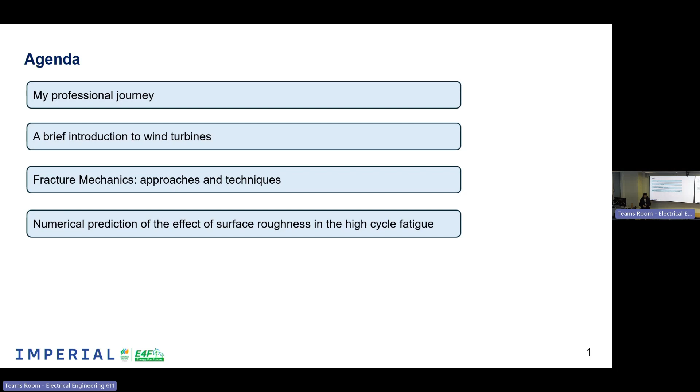So first of all, I'm an MSCA E4F fellow at Imperial College. I started 1 year ago in February 2024. E4F comes from Energy for Future. It is a network that is inside the Horizon 2020 MSCA co-fund. In this program, projects are co-funded by Marie Curie Actions and also an entity, and in this case, the entity of our network is Iberdrola. Inside our network, we have projects related to energy, basically, but to different areas.

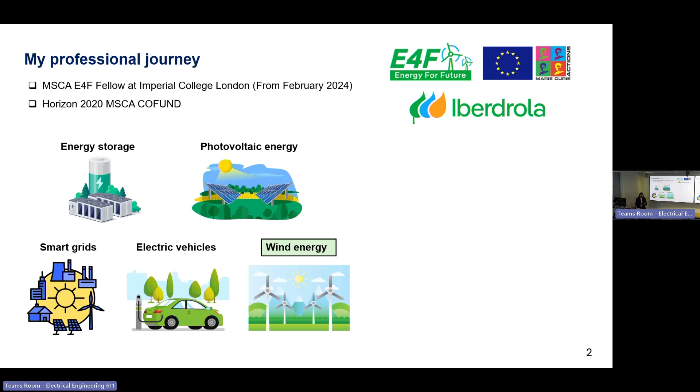I also belong to 2 research groups. The first one is the Mechanics of Materials Lab at the University of Oxford. It's a research group in charge of studying the mechanical behavior of materials for different applications. For example, hydrogen, batteries, wind energy, concrete. Moreover, I also belong to another research group at University of Seville. It is a research group also in charge of studying the mechanical behavior of materials, but in this case for aircraft, solar energy, trains, wind energy, etc.

So now, coming back to the topic, I would like to explain to you, before going deeper, why it's important to talk about wind energy. So today is Thursday, 20th of March, and from the beginning of the week, the world has consumed more than 4 million millions of terajoules. You can think that this is a huge quantity, but in fact, it is increasing. It's increasing at 2% per year. 80% of this energy comes from fossil fuels, and about 5% comes from wind energy. Looking at these numbers, maybe you can think that this percentage is so tiny. Why is it important to talk about wind energy? Let me go further.

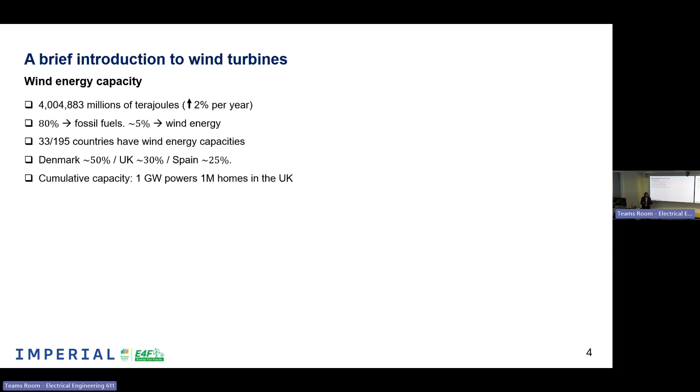33 out of 195 countries have wind energy capacities, so not a big percentage in the world. And there are countries in which wind energy represents a huge percentage. For example, Denmark has 50%, UK 30%, and Spain 25%. So actually, wind energy is important, but it's particularly important for certain regions in the world where it's becoming an important energy source, such as Europe, no?

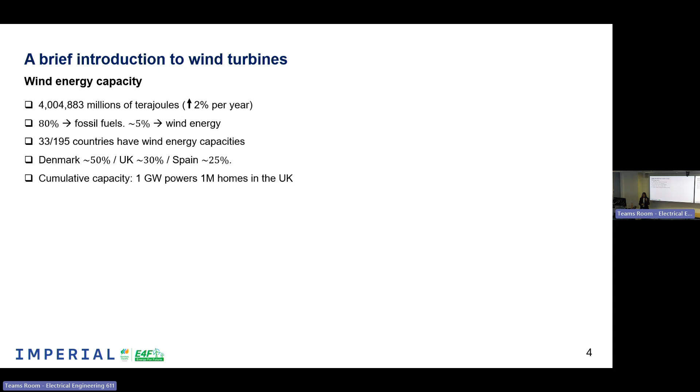In fact, when we talk about wind energy, we don't talk about these numbers. We talk about cumulative capacity, that is the power that a certain installation or a wind turbine is able to produce. Just to give you a number, if we can produce 1 gigawatt of power, then we will be able to feed 1 million homes in the UK. So looking at the cumulative capacity in the last 14 years, you can see that it has increased dramatically. It has increased about 5 times.

Moreover, I have also included 2 types of energy here. One is onshore wind energy, that is the one generated on the land, and offshore wind energy, that is the one located in the sea. And as you can see, 14 years ago, offshore wind energy was representing just a tiny percentage because the technology was not fully developed. However, 14 years afterwards, it is almost the same between onshore and offshore.

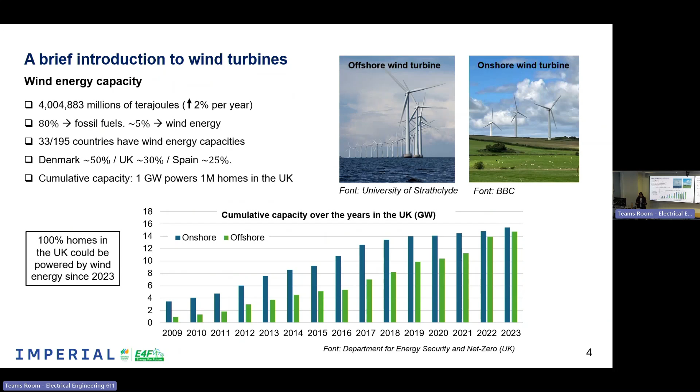If you look at this number, the one in 2023, it is more or less 30 gigawatts. And in the UK, we have about 30 million homes. So that means that if we use the wind energy only to feed homes in the UK, we will be able to survive with that, no? To work only in the homes.

So how is this wind energy being generated? Well, they are generated by wind turbines, and they are a clean and cheap system. They are one of the cheapest ways to get energy, and they are clean because they don't produce greenhouse gas emissions. Maybe you know that, but I would like just to clarify.

They are made by a tower, a foundation that is connecting the wind turbine to the floor. The blades, normally the typical configuration is 3 blades. The nacelle that connects the blades to the generator to generate energy. The wind vane that is in charge of detecting the orientation of the wind so that the wind turbine is always facing the direction of the wind, and the transformer that is in charge of increasing the voltage of the energy so that it can be easily transported.

If we talk about offshore, then the foundation is a little bit different because we are in the middle of the sea and we have different proposals. The most typical one is the monopile. We do well to talk about offshore because, in fact, offshore has much more potential than onshore wind energy. This is because offshore wind turbines can be bigger because they are in the middle of the sea, so we can decide the size of these kind of devices, and they can face stronger winds.

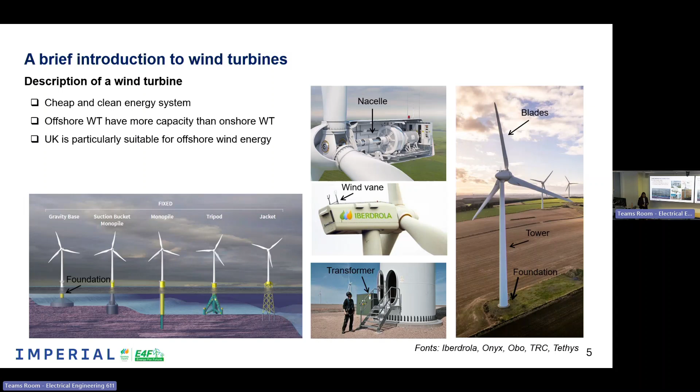And in fact, this is very important for the UK because in the UK, we have long coastlines, we are an island, and we have strong winds. So we can use this methodology to get energy very easily. So offshore seems to be a promising solution, and in fact it is.

It is the largest rotatory machine in the world. Here in this picture, I have compared the offshore wind turbine with the Airbus A380, that is the largest civil passenger aircraft in the world. And as you can see, it seems like a small animal next to the wind turbine. So the wind turbines are very huge.

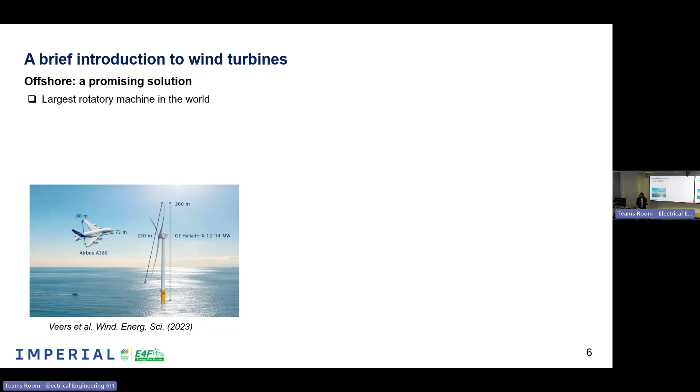In fact, what is more interesting is that it's a technology that is growing really, really fast. The first wind farm was installed 35 years ago in 1991 in Denmark. It had 11 turbines and a total of 5 megawatts of energy production. However, nowadays we have projects that are huge. For example, I would like to highlight Hornsea, that is a huge wind farm in the UK. It has like 4 different phases, and now we are at phase 2, Hornsea 2. And actually, it is the largest wind farm in the world.

It has 165 turbines, and each turbine is able to generate 8 megawatts. The total production is about 1.4 gigawatts. But looking at those numbers, something very interesting is that one turbine from Hornsea 2 is able to generate more power than the first wind farm that was installed just 35 years ago. So in 35 years, we have grown a lot.

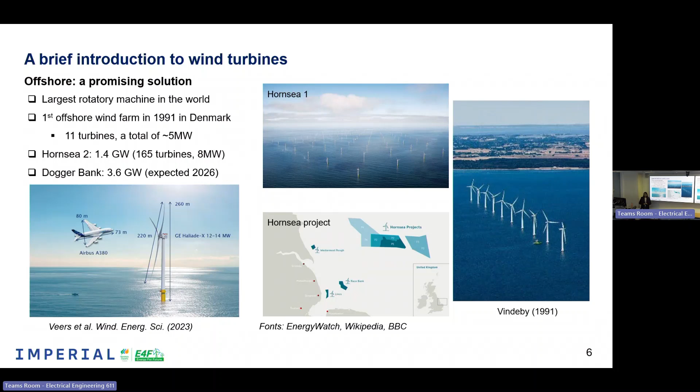What's more important is that this growth is exponential. Nowadays, we have projects that are planning to increase this more and more. For example, the Dogger Bank is a project that is expected to be finished around 2026, and it will have a total power of 3.6 gigawatts.

So since we are growing really fast, we need to face many new challenges. One of these challenges is that we need to face new winds acting on lighter blades. In the last 40 years, the size of the wind turbine has increased 1 order of magnitude. And the blades have reduced their weight about 90%. So we have bigger wind turbines and lighter elements.

And since we have bigger wind turbines, they are surpassing the atmospheric layer. So we are arriving at new layers where the boundary conditions are more complex, completely different, and we need to face that. We need to ensure that the blades will be working. We need to integrate this new system in the environment. And this is quite interesting because all systems have disadvantages. Wind energy is not perfect. And these are some disadvantages.

Once we install a wind farm, we can affect the wildlife, we can generate noise, we can affect the crops in the case of onshore wind energy. We can generate some vibrations in the floor. We can cause radar interference, and we can even create new microclimates, because the winds change when they encounter the wind turbine, and as the winds change, the climate can change. So there are many things that we need to face.

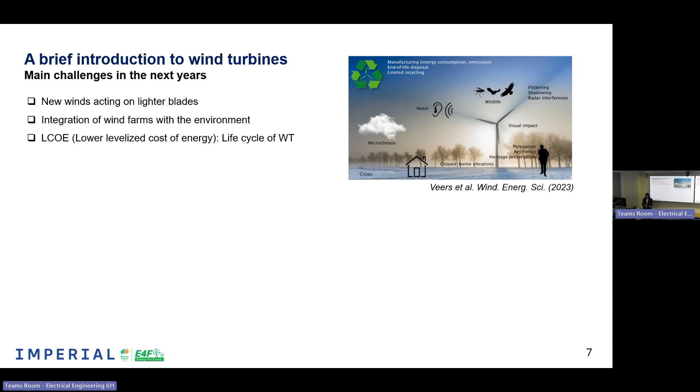Moreover, we want energy, we want clean energy, but we also want cheap energy. And this is very important in wind energy. So we are always looking for a lower levelized cost of energy. And this is completely related to the main topic of this seminar, that is the life cycle of wind turbines. Nowadays, the life cycle is between 20 and 25 years, which is really short. So in 25 years, we need to change the largest rotatory machine in the world, which is really expensive. And we need to look for different ways to improve this number and to increase this life cycle.

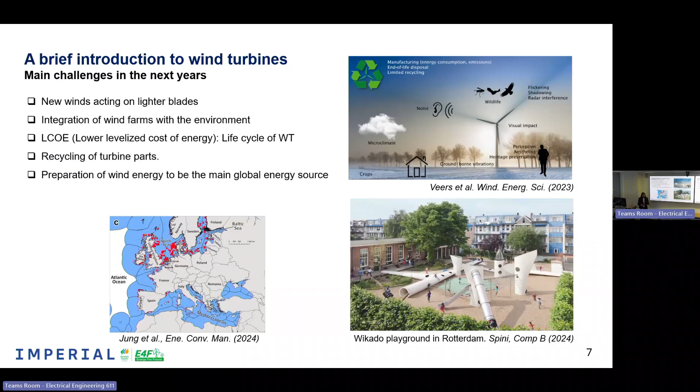Moreover, not all countries are like the UK. Not all countries have sea and strong winds, so we need to face that. That means that if a country, for example, has low winds, we need to adapt the system so that it is able to capture the energy from these low winds. And in the same way, if the country usually has strong winds, then we need to look for new solutions to face that.

And to all these challenges, we need to add the fact that we have political pressure, because there are now many challenges related to energy, as we all know. For example, the net zero target by 2050 in the UK proposes to reach zero greenhouse emissions by this year. And they have selected wind energy as a promising solution to do so. So we need to face it, and we need to face it really fast. We have the political pressure to enhance this. So here we have many challenges for the researchers.

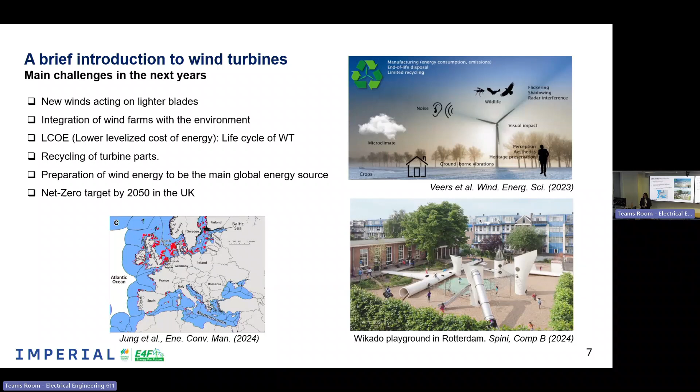I would like to talk about just one of these challenges, that is the life cycle of wind turbine structures. Why is it so short, just 20-25 years? Well, first of all, wind turbines have to face a very complex loading profile. They have to face the wind acting on the wind turbine, the current if we talk about offshore, the meteorological phenomena, rain and any other kind of phenomena, the weight of the rotor, the nacelle, everything, the gyroscopic loads when it changes orientation, and also the centripetal forces, because the blades are rotating and generating a centripetal force. So many loads.

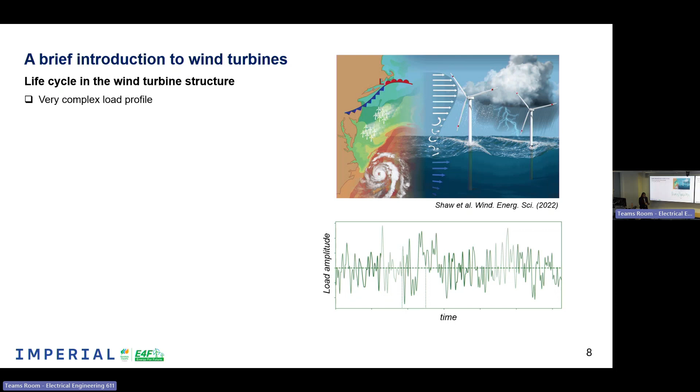And what is more critical is that some of these loads are random. We don't know the amplitude and when they are going to happen. So we have a loading profile like this one. And during the life, 20-25 years, we can face about 1 million cycles. And what's worse, we don't know how it's going to be.

This is critical, but it's also critical that the methodologies that are now being applied to estimate these fatigue lives, they are, in my opinion, too simple and too conservative. How are they doing this? So they select the material they want to apply in the structure. After that, they make the specimens, they go to the lab, and for each level of load, they apply what is called a fatigue test.

They apply a cyclic load, they define the number of cycles at which the specimen is breaking, and they build these kinds of curves that are called SN curves, where they relate the load with respect to the cycles. Now they apply a certain rule, that is the Palmgren-Miner rule or another similar one, where they quantify the damage of the structure. This damage is just quantified by correlating the number of repetitions of loads that we have in a certain profile that we have estimated with respect to these values estimated in the lab.

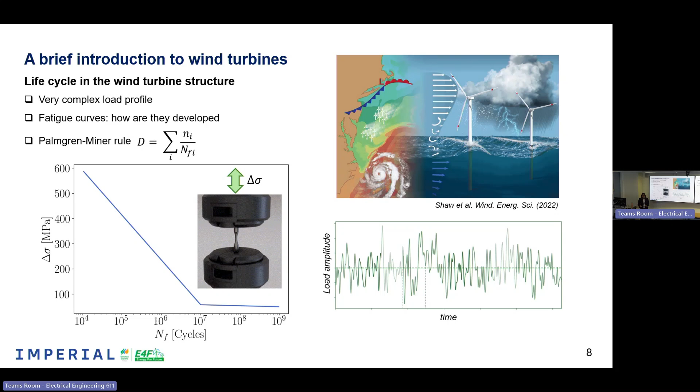As you can imagine, this is not enough. We have many effects that in this methodology I didn't include. For example, we have the effect of welds, because wind turbines, the towers, they are made in sections and they need to be connected one with each other. And to connect them, we need bolts and welds. We have circumferential welds and also longitudinal welds. So these welds, they are critical for fatigue as well.

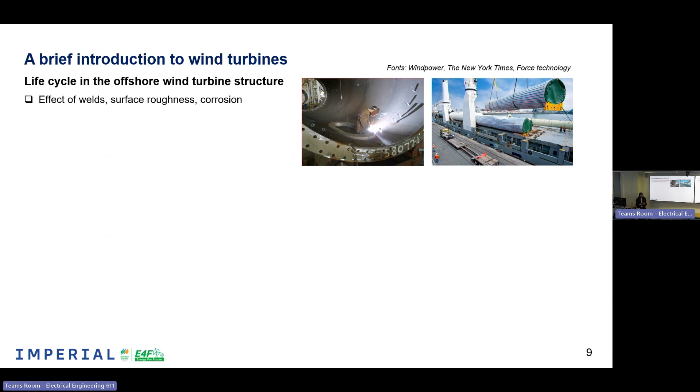We have surface roughness, that is very well known to be critical for fatigue because the different valleys, they act as stress concentrators, as we will see later. And then we also have corrosion, that is a chemical reaction between the sea and the metal or the wind and the metal that is generating some pits, and the pits evolve until cracks are propagated. Moreover, these two are completely related, because we want to put some painting to avoid the corrosion, but to put the painting, we need to generate surface roughness. So we have to decide which one is less worse, let's say.

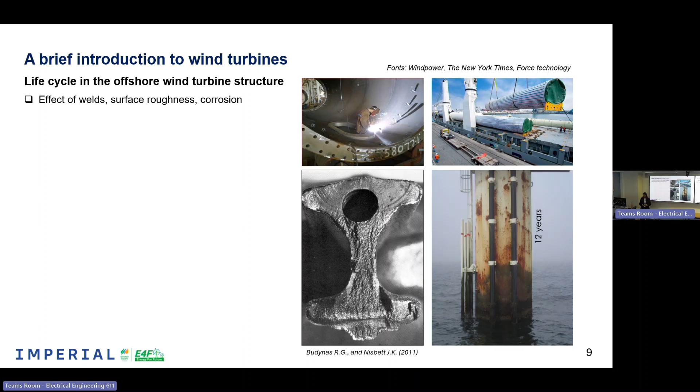To add all of this in industry, nowadays, they apply a knockdown factor. That is an empirical value obtained doing many experiments, and they have come to the conclusion that this knockdown factor is around 3. So they take the curve we have seen in the specimen before, and now they apply this knockdown factor, they reduce the curve, and this is the curve of our fatigue wind turbine. In my opinion, this methodology is too conservative because we cannot include all these effects in just one value, and it is making the fatigue life so short. It is between 20 and 25 years.

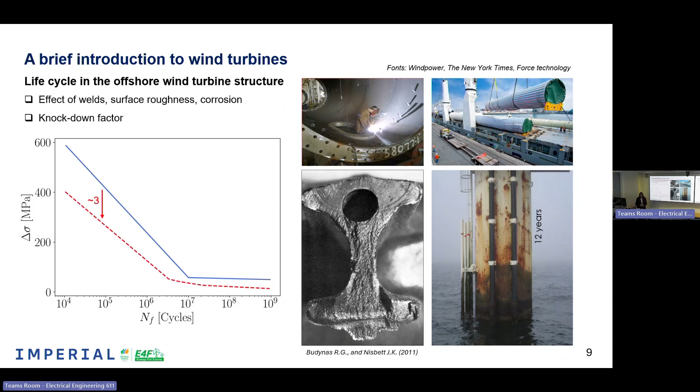So here is where fracture mechanics has a lot to say, because maybe it is able to predict in a better way all of these effects and to enhance the prediction of the fatigue life of wind turbines. Maybe the real fatigue life is 50 years, for example. So fracture mechanics is a discipline that is quite young. It started about 100 years ago, and before fracture mechanics, things were breaking heavily. So we had the Industrial Revolution, we were building many things, many new machines, many new transport ways, and things were breaking and we didn't know why.

So for example, I would like to highlight the Titanic, because I'm sure you all know the accident. It happened in 1912. It was a dramatic accident because the boat was breaking in the middle of the North Atlantic and about 1,500 people died. After that, an aeronautical engineer was motivated to create the first idea about how cracks can be propagated. It was in 1920, and he said that it was completely related to energy. So if the energy stored in the solid reaches a certain critical value, that he called the critical energy release rate, then the crack will be propagated because the crack has enough energy to propagate.

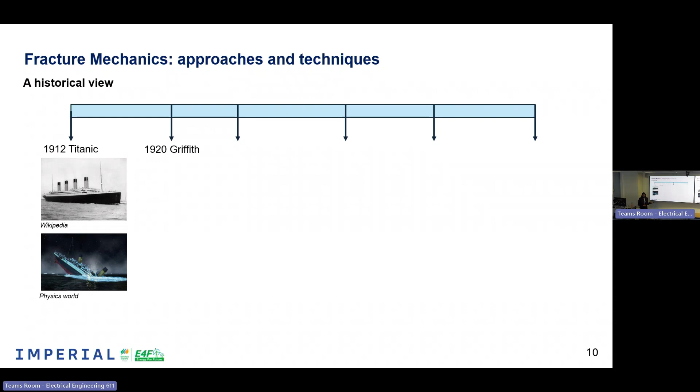This was a brilliant idea, and in fact, it is still being used, because this critical energy release rate is a material property that is now in the day-to-day of materials, but things were still breaking. For example, we have the Liberty ships, that were American boats in the Second World War, and they built around 2,000 boats. Around 400 boats were damaged during their service, and about 150 boats were catastrophically damaged. They were completely broken in the middle of the sea. So huge accidents. Moreover, we also have the de Havilland Comets. I don't know if you know it, but this was the first passenger jet aircraft, and it started from here, very close, Heathrow Airport.

It was, in the moment, very important news for the world, but some of these kinds of aircraft were crashed, and they normally crashed after about 3,000 hours of flight. When they tried to see what was happening, they observed cracks generated around the windows, because there were stress concentrators generating fatigue cracks.

So now we don't have stress concentrators in the wings, in the aircraft, in the windows. You can see that this is around, it has a round shape. So this was also pushing science to really understand what was happening.

And Irwin, in 1957, included the plastic effects in the theory given by Griffith. But although it was also a brilliant idea, it was not enough, because all these theories were just predicting crack propagation. They were not predicting how cracks are nucleated in a material.

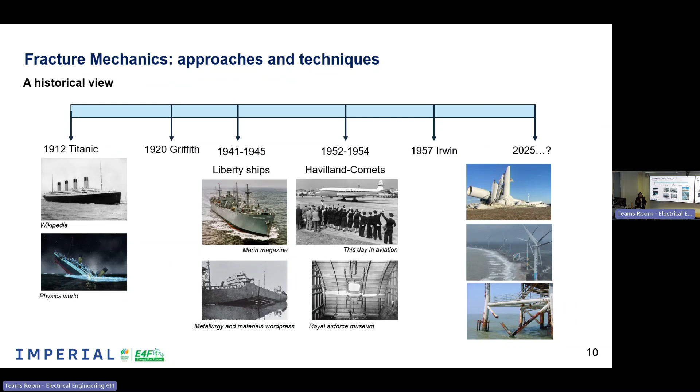And I would like to present two different theories that maybe are suitable for this kind of prediction. One of these is the Coupled Criterion, developed by Leguillon in 2002. It is able to predict both crack nucleation and crack propagation, and it is based on two different conditions.

First of all, we assume an expected crack path in the solid. We select a certain crack path, and over this crack path we measure the stress condition, where we compare the tensile stress with respect to a critical value, the tensile strength.

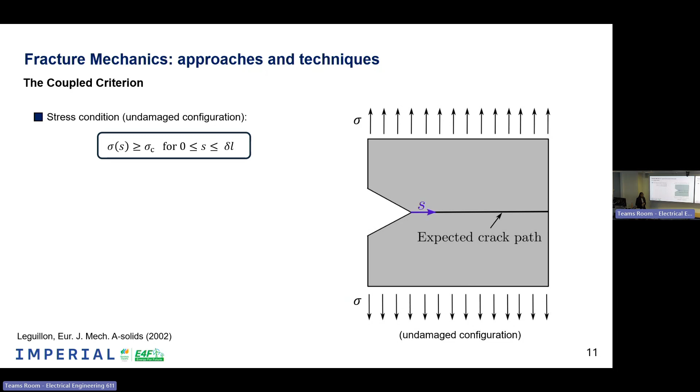Then we add the energy condition, based on the assumption of a certain crack that has a size delta L, called the newly created crack length. For this delta L, we measure the difference in potential energy, and we divide it by this delta L, the newly created crack length.

And we compare this value with respect to the material property created by Griffith, the critical energy release rate. So when both conditions are fulfilled, at the minimum admissible load at which it is fulfilled, we will have crack nucleation.

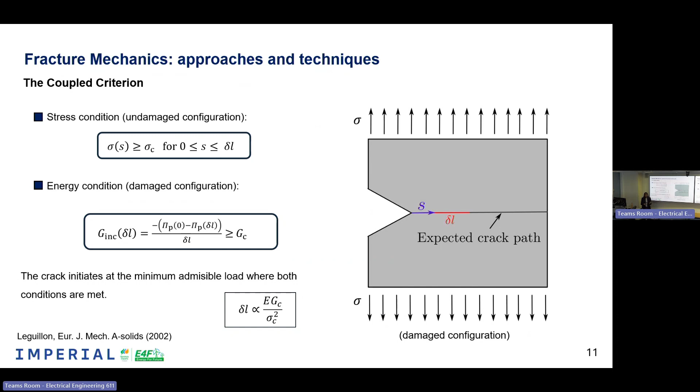As a consequence of applying this criterion, we get a new crack nucleation length that is proportional to the material properties, as you can see here. This crack nucleation length represents a first jump that the crack does when it is nucleated.

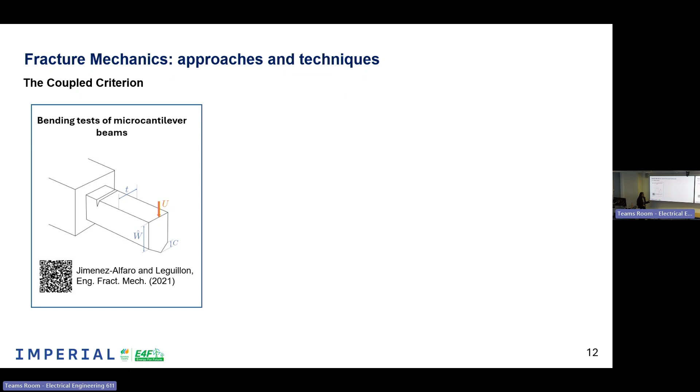So this theory has been applied in many fields and applications. For example, we have used this theory to predict the fracture toughness of ceramic materials in bending tests of microcantilever beams. We have also used it to predict crack jamming, crack propagation, and crack deviation in brittle matrices with short reinforcements, such as platelets or short fibers.

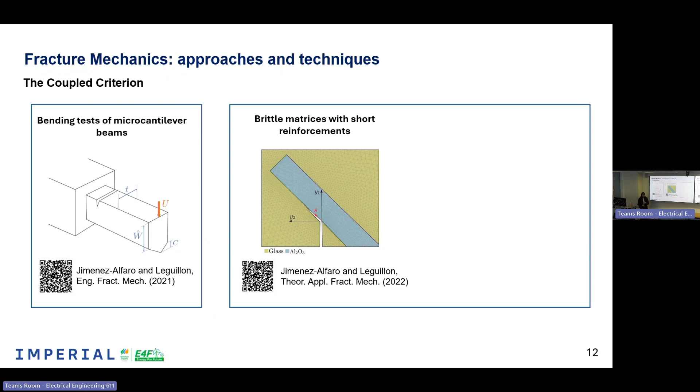In fact, we have also included the effect of volume fraction and residual stresses. This was very interesting work, because it was an industrial collaboration with Safran. Safran is also very motivated to improve their engines, because they need to reach net zero gas emissions, as we were talking about before. So they are trying to investigate new materials, and among others, one of these materials for their engines was very similar to this one. So we estimated for them the fracture toughness of their material for their new design.

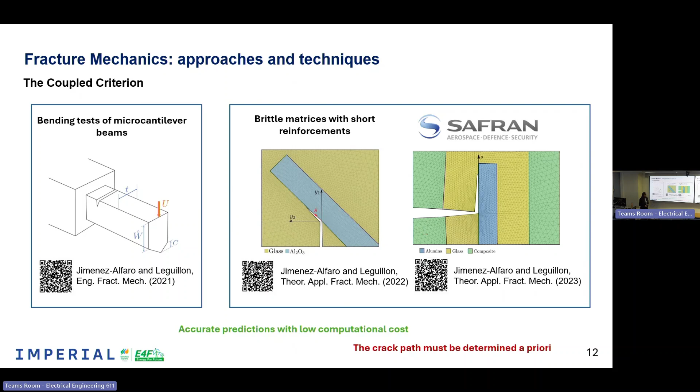Although this methodology is very accurate and has a low computational cost, it has a clear disadvantage: we maybe don't know the crack path a priori, and we must know it in order to apply it. So for this reason, I would like to present another theory, called the phase field for brittle fracture.

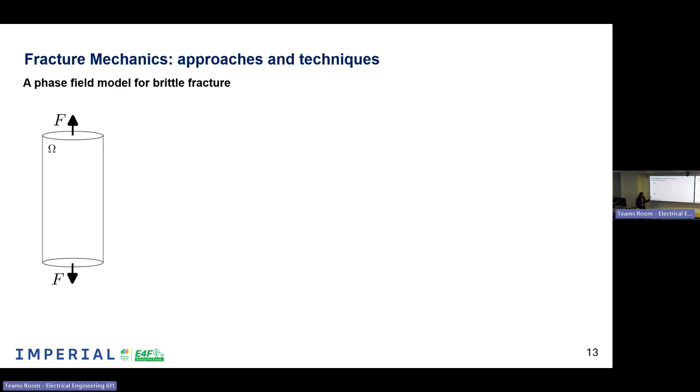To understand this phase field idea, I would like you to imagine a bar in tension. Imagine that the bar is under a certain loading, and at a certain moment the bar is broken into two different pieces. Then a sharp crack will appear. The main idea of the phase field is to substitute this sharp crack with a smooth region.

We introduce a new variable called the phase field variable that goes from 0 to 1. It will be 0 if the material point is not damaged, and 1 if we've arrived at the crack, if the material point is completely damaged. With this, we can substitute this with a problem where the crack is represented as a region, not exactly as a sharp interface.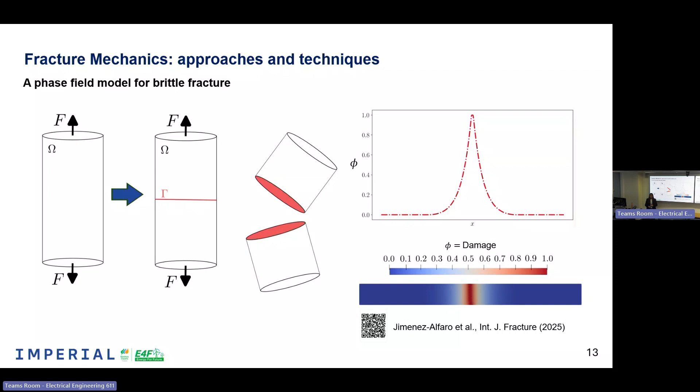How can we do this with mathematics? We can define a regularized functional defined as the sum of two terms: one is the internal energy, and the other is the external work acting on the solid that comes from the volume forces and also the contour forces. The solution to this problem—this phase field variable defining the damage, and the displacement field—is just the solution from applying three different conditions.

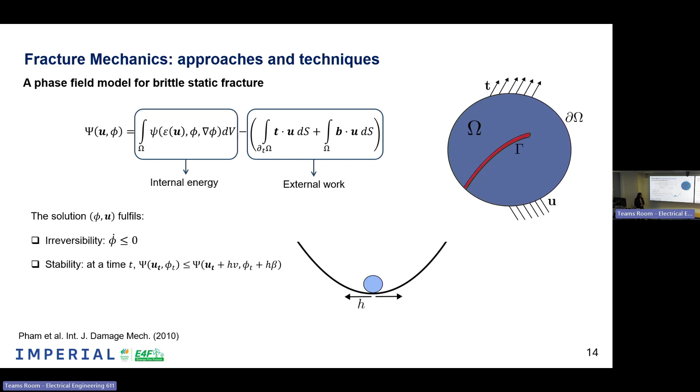The first is the irreversibility condition: it means that the damage cannot go back. If something is broken, we cannot fix it. The stability condition: the solution must always be stable. And the application of the law of conservation of energy. Applying these three conditions to this regularized functional, we obtain the solution of our problem.

The internal energy in the solid is defined as the sum of two terms. One is the elastic internal energy density, which is itself the sum of two terms, where you can see that these terms have a positive sign or a negative sign. This comes because we need to take into account the fact that only tensile stresses generate cracks.

So if I apply tension, the crack will propagate or nucleate, but if I apply compression, we close the crack. This must be taken into account somehow, and it's done by splitting the energy terms. There's another term called the fracture energy density.

Looking at this definition for the fracture energy density, you can see it depends on different terms. One is GC, the parameter given by Griffith, the first researcher investigating this. The other parameters can be estimated by applying a one-dimensional case.

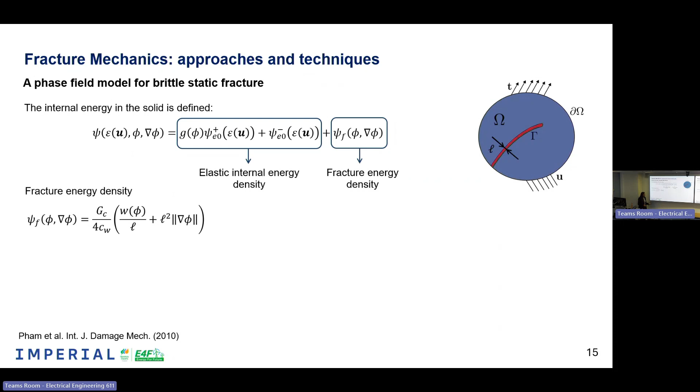The one-dimensional case is very interesting because we can get the analytical solution of this problem. We represent the tensile stress with respect to the tensile strain, and we assume that when the tensile stress arrives at a certain critical value, called the tensile strength, catastrophic damage will happen—the crack will arrive.

With this, we can define the parameters. L, the so-called phase field length scale, is also a property of the material—it depends on GC and sigma C. CW is a constant. Finally, the function W(phi) can differ: if we consider an elastic threshold first (no damage), this would be phi, or phi squared if we consider that damage grows from the beginning, although not enough to propagate or generate the crack.

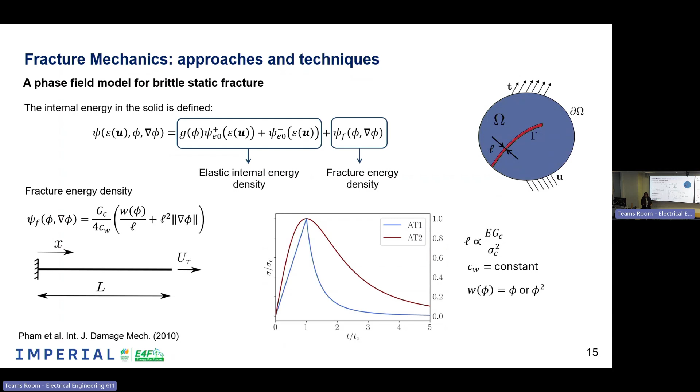Now we can extend this to fatigue, the main topic, by adding a degradation function that degrades the critical energy release rate—the material property defining fracture—over the cycles. Using this function in the formulation, we can apply cyclic loads.

There have been many proposals for this function, but I'll tell you about one that seems very suitable. It's a function of different terms: A and B are the coefficients of Basquin's law, the equation defining the SN curve for fatigue we discussed before—the curve relating load to the number of cycles to failure.

R is the stress ratio, the quotient between the maximum stress in the cycle and the minimum stress in the cycle. Finally, sigma E is what they call the endurance limit—the fatigue strength, the fatigue load, for which we will arrive at 1 million cycles. This parameter is really important, please keep it in mind because we will use it later.

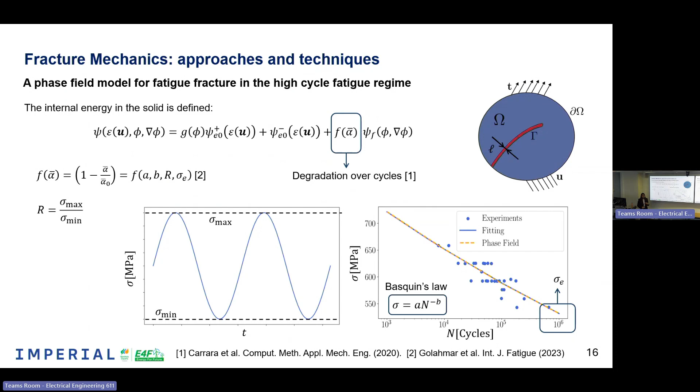With all of this, we are now in a position to apply it to one of the main topics of this problem: the effect of surface roughness. As I've mentioned, this is very well known to be critical for fatigue. Now I'd like to present a numerical prediction we've made of the effect of surface roughness in high cycle fatigue.

Surface finish was always very well known to be affecting fatigue. In the 60s, Marin introduced a correction factor, a coefficient measuring the effect of surface roughness in fatigue. This coefficient is just the quotient between the endurance limit of the rough specimen divided by the endurance limit of the polished specimen.

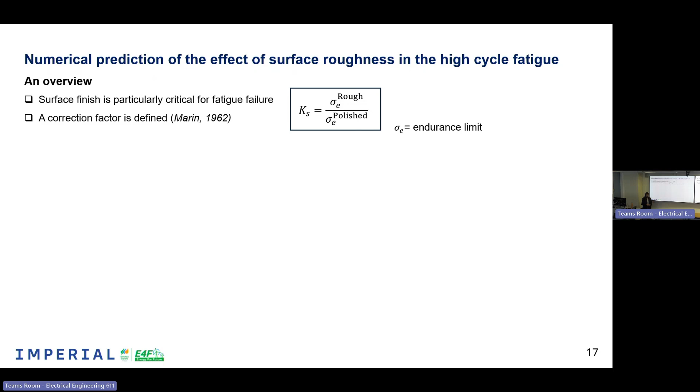So there were many attempts in the literature to measure this KS, this surface factor. On the one hand, we had experimental attempts. For example, in the 90s, they plotted these kinds of curves where they represented the surface factor as a function of the tensile strength for different values of the surface roughness.

They were increasing the level of surface roughness and measuring this using a lot of experiments. Or for example, in 2012, they also computed the surface factor as a function of the tensile strength, but for different surface finishes in the metal, in this case for steel. For example, as forged, hot rolled, or machined, relating more the type of production, the type of manufacturing, with the surface roughness and the effect in fatigue.

The problem of experiments is that they are expensive and also limited. To do a fatigue curve in this kind of area, we need about 10 or 12 specimens. This is at least what regulations say. If we need to include the effect of surface roughness, then maybe we need more, because surface roughness is random, a random phenomenon. So we need to try several times to get a good, reliable value. We need to spend a lot of money buying specimens and breaking them to build just one curve.

Moreover, it's limited because although we have all the money we want and can do any experiment we want, we cannot reach the infinite number of cases that we can have. So at some point we need to stop and just give a prediction.

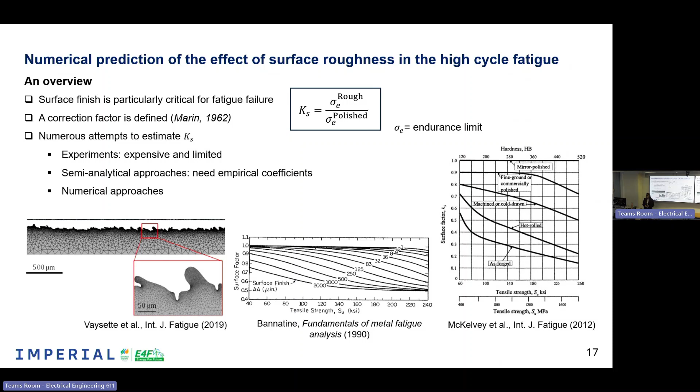So in this context, the main objective of our work is to develop a numerical framework able to describe the effect of surface roughness, in particular in the high cycle fatigue regime, because this is where surface roughness is more critical, and this is what the literature is looking for: the effect on the endurance limit between the rough specimen and the polished specimen.

Basically, our numerical tool combines two different tools. One is the phase field model for fatigue fracture that I presented before in the previous methodologies we were talking about, and the other is a stochastic tool to build a roughness-resolving mesh.

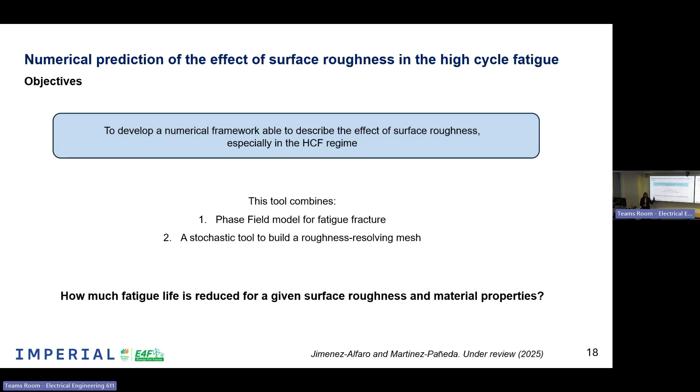So the idea is to build a tool that is able to generate the roughness without any microstructure from the lab. Basically, we want to answer the question: how much is fatigue life reduced for a given surface roughness and material properties? That's the question we want to solve.

So I have presented to you the phase field for fatigue. I assume you know it. So we will go on with the second tool that is combining this general computational framework. That is how to build a tool for roughness, how to build a roughness without any specimen or any microstructure.

So first of all, imagine that we have a one-dimensional case where this is a polished specimen and the points, the nodes of the mesh, are represented by T. T is the initial position of the nodes in a polished mesh. And then at a certain moment, we want to apply a surface roughness. So we just apply a certain height deviation. How can we do it?

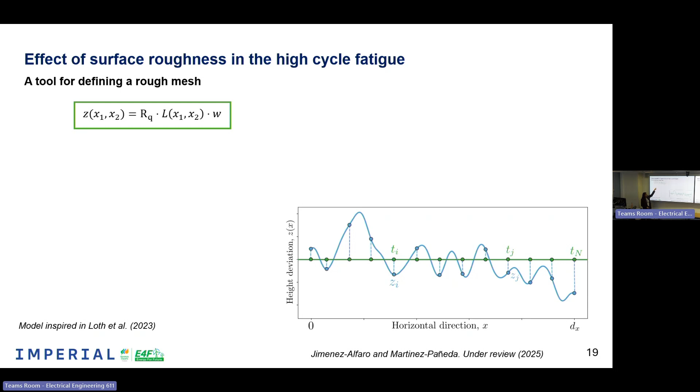We define the height deviation as the multiplication of three terms. RQ, that is the root mean square surface roughness. It is a typical measurement in the surface topology of a certain profile. L, that is the Cholesky decomposition of a matrix that is called R. R depends on T, the initial position of the nodes, and the correlation length, that we will talk about later. And then W, that would be the Gaussian white noise.

So including W in the formulation, we include the randomness of the problem. We know that surface roughness is random. Each time we can have any kind of profile, and with this we change the height deviation. So imagine we take two different Gaussian white noises, we will obtain two different height deviation profiles.

I told you about the correlation length, and this parameter is defined as a certain threshold of the ACF, the autocorrelation function. This ACF is a function of tau. Tau is just a parameter that we use to define this threshold that we are interested in. And now when we represent it, we have different criteria proposed in the literature to measure the correlation length.

The first one is when we consider that the ACF has decreased to 10%. The second one is when we consider that the ACF arrives at a value that is equal to 1 divided by e, the Napier constant. And finally, the third one is when we consider that the ACF reaches a value of 0.2. So we have three criteria, and one of the objectives of our tool is, in fact, to reach the conclusion which one is better for the predictions.

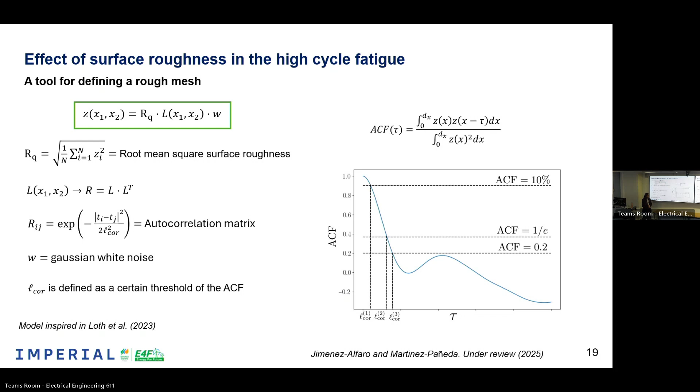Sorry. So now the surface roughness, as I've said to you, is a random problem. So we cannot just do a simulation and get the result. With that, we have nothing. We need to get reliable results, and to do so, we need to get a sample. So one of the problems is that we need to have a sample size.

Another problem is that we have applied a Gaussian white noise, so we know that the surface profile will follow a Gaussian distribution, but we are not sure about the results. So to ensure that our results follow a Gaussian distribution, we take a sample that has a minimum of 30 specimens, and following the central limit theorem, we will have a Gaussian distribution. So now we just have to check that our results are reliable.

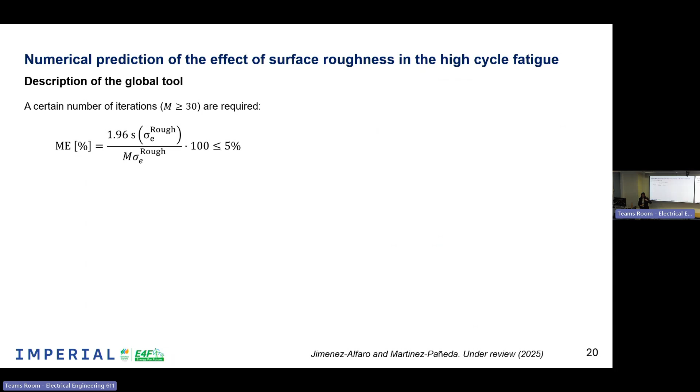And we have established a criterion: we measure the relative margin error, that is made by the standard deviation of our distribution divided by the expected value and also the size of the sample. And then we express it as a percentage, we compare it, and we say that our results will be reliable if it has a relative margin error of less than 5%.

So now with that, for a certain cyclic load profile, we will compute our computational framework so that we get the number of cycles. I will explain to you how. First of all, we build the mesh assuming that we have a polished specimen. So for the moment, we don't have any surface roughness. We just have the specimen we are interested in. After that, we define a certain characteristic for the surface roughness we want to know.

For example, the average surface roughness, just typical measurements in a surface profile, or the correlation length, again the same, typical measurements that can be obtained in an easy way. Then after that, we obtain the matrix R, that was this original matrix that depends only on the correlation length and the initial position of the nodes.

And after that, we start an iterative procedure. So for a certain level of load, we compute a new Gaussian white noise, so one proposal for this randomness. We obtain the height deviation profile, we build the rough specimen with our tool, and finally we use the phase field model for fatigue to obtain the number of cycles to failure.

We repeat this until we have a minimum of 30 specimens, and also our relative margin error is lower than 5%. Once we have that, our estimation of the number of cycles to failure will be just the mean of this distribution, and then we have the value.

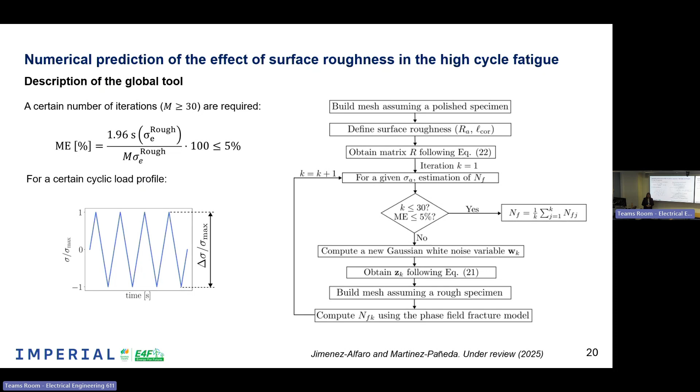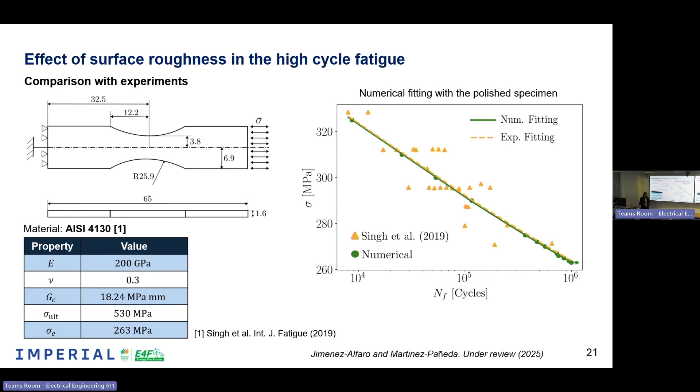And first of all, we need to define the parameters of our model. As I've shown you before, when we were presenting the phase field model, we have different parameters, so we need to define them and to be sure that this works. So we use just the polished specimen with no roughness at this stage, and we compute our parameters. We use the phase field to check that our numerical fitting is fitting the experimental one. So we approach just the experimental results of the polished specimen. Once we have our numerical calculations completely calibrated, then we go on with the surface roughness.

What's more, at this stage, I would like just to make a point. Now I'm talking about the average surface roughness, but when I presented this tool, we were talking about the root mean square surface roughness, that was Rq, another parameter. Well, indeed, in this case, it doesn't matter because we are following a Gaussian distribution, and that means that these two typical measurements in surface profiles are related. So we can use one or the other one.

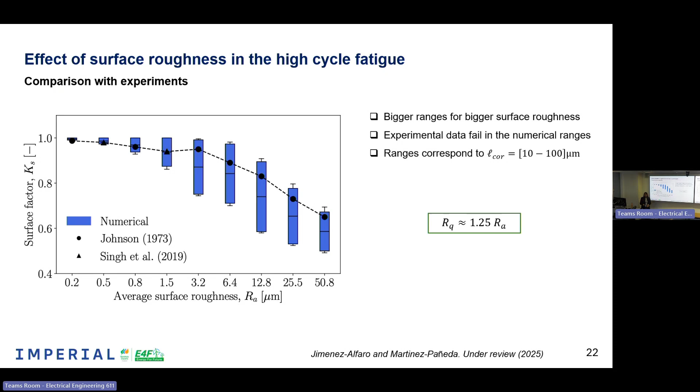Moreover, as the average surface roughness grows, the experiments seem to be closer to the upper bound. So that means that the typical correlation length of those profiles maybe is bigger. With this, we have an approximation, but imagine if we know the correlation length. This is what we are going to do now.

Here in this table, we also have the experiments of Singh et al., but in this case, they gave us the surface profile, this kind of graph that is very typical in the papers for surface roughness. And with this, we have just extracted the data, we have computed the ACF, and using the three criteria, we have got the correlation length.

So once we have the three different correlation lengths, because we have three different possibilities, we have computed our numerical result, our numerical surface factor, and we have compared it to the experimental one. As you can see, results are very accurate. In fact, the most accurate one is the ACF equal to 0.2, because the prediction has less than or around 1% error, so almost the same value.

This is not just a random thing. The ACF equal to 0.2 is the criterion proposed by the ASTM regulations. So that means that they were right. This is the most accurate one. We have checked that.

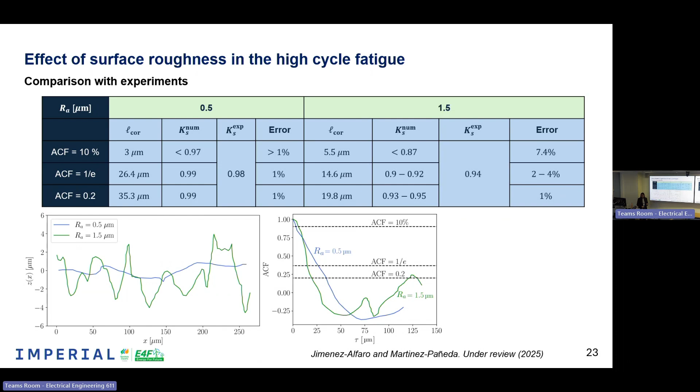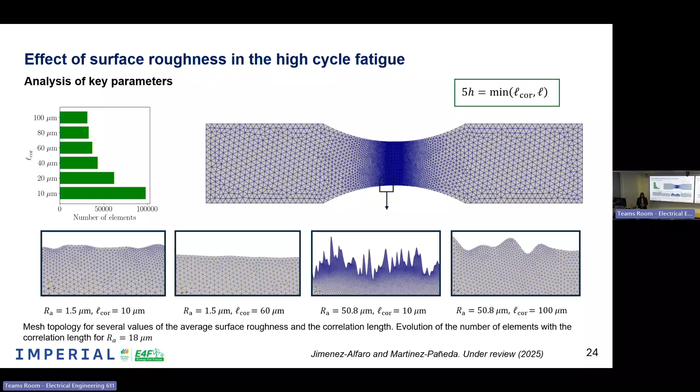And we have established a compromise relationship where 5 elements need to define either the correlation length or the phase field length scale, just a minimum of the two. And with this, we ensure that the data is correct. How do we know that 5 elements? Well, it is not our idea, in fact. It was proved in the literature for the 2 cases. So we just follow, in this case, their tests.

After that, we have included here just the damage profile, just to show you how it works. So these peaks are acting as stress concentrators, and in those peaks we have very big stress so that the crack is nucleated. Once the crack is nucleated, that is represented in red color, then it is propagated until it arrives to the center of the specimen, more or less.

Since we are in a force control problem, at a certain moment, the damage variable will cover a huge region, because in a force problem, the force stops at a certain value, and the displacement can be infinite in the results of the force displacement curve. So here it is translated into a huge region where damage is equal to 1. At this point, we define our fatigue failure, and we say that we have arrived to the number of cycles we are interested in.

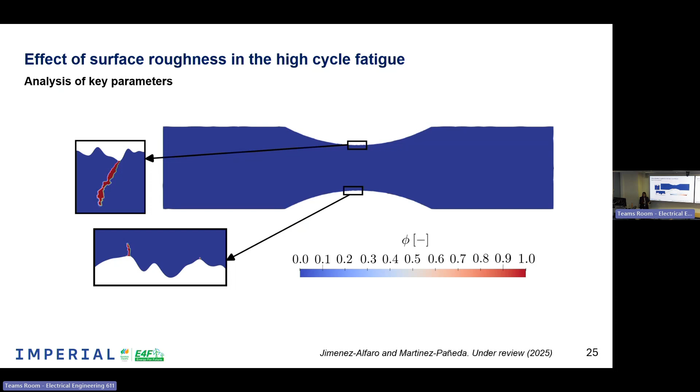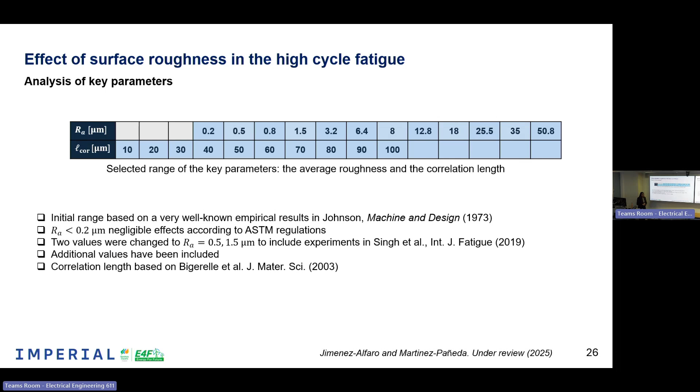Moreover, we have changed these 2 values just for the economy in the simulations, because we wanted to compare with experiments of Singh et al. And we have also included additional values to really capture the evolution of the surface factor with respect to these 2 parameters. We can do it. This is an advantage of our computational tool, that we don't spend a lot of money. We just use a calculation cluster, so we can include as many parameters and values as we want. And finally, we have decided the range for the correlation length based on a proposal in the literature.

That is really critical. Imagine a polished specimen with a certain load has 1 million cycles. It's broken at 1 million cycles. But if we include this surface roughness, it will be broken with the half. It means with 500,000 cycles, just the half.

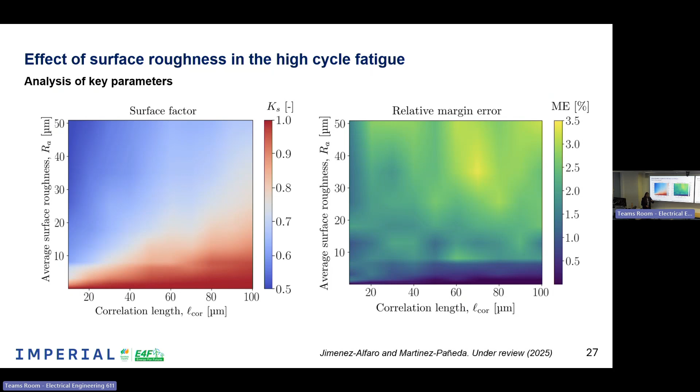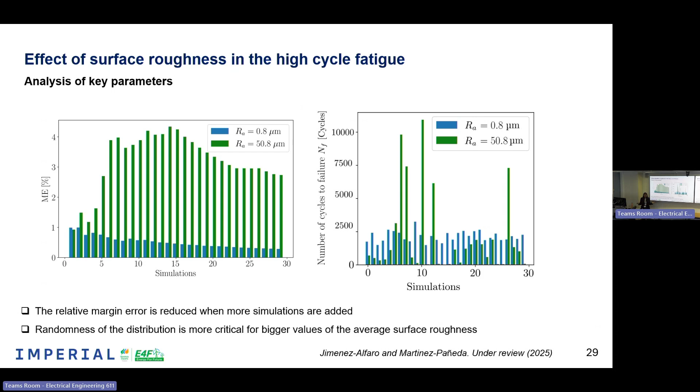It changes a lot. Looking at the number of cycles that we can predict, it can be even dangerous, because here we have selected a load level just to have an expected value of around 2,000, 3,000 cycles. And you can see that for very big values of the average surface roughness, in one case we can have 2,000 cycles, in the next one we can have 10,000 cycles. So we don't know. This is the key point of randomness.

So just to finish, I would like to give you some concluding remarks. First of all, we have developed a computational framework that is able to predict the effect of rough surfaces in fatigue life of any kind of specimens. We have shown you that there is a good agreement, both qualitative and quantitative, with experimental data. We have built some operational maps where we have faced the surface versus the fatigue effect. And this is good because we can propose these operational maps as design tools so that people can design their specimens or their materials following these operational maps.

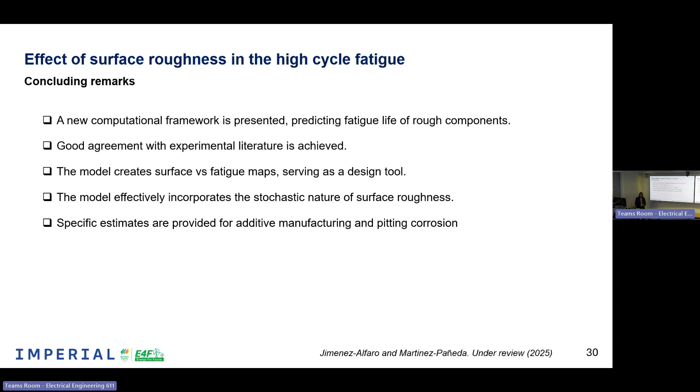And what's interesting is that the model is including the effect of randomness, that is a natural effect in the surface roughness, inside the model. And although we have this, we are obtaining reliable results. And finally, we have not included this because we didn't have time, but we have also done estimates for 3D printing, for additive manufacturing, and pitting corrosion. And we have checked that we are able to give good estimations of the surface factor in different environments, checking with experimental data.